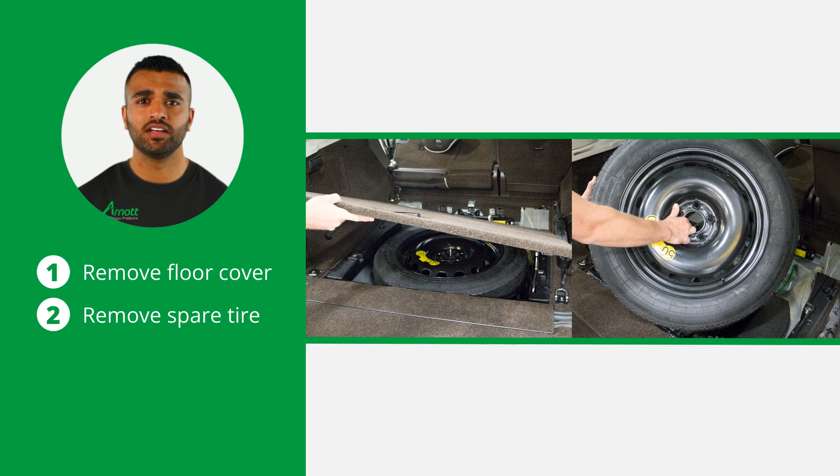Start by removing the floor cover and spare tire in the rear cargo area to expose the vehicle's air suspension compressor housing. Now remove the 4 bolts holding the compressor cover to the vehicle. Then remove the 2 foam pads and the compressor from the vehicle.

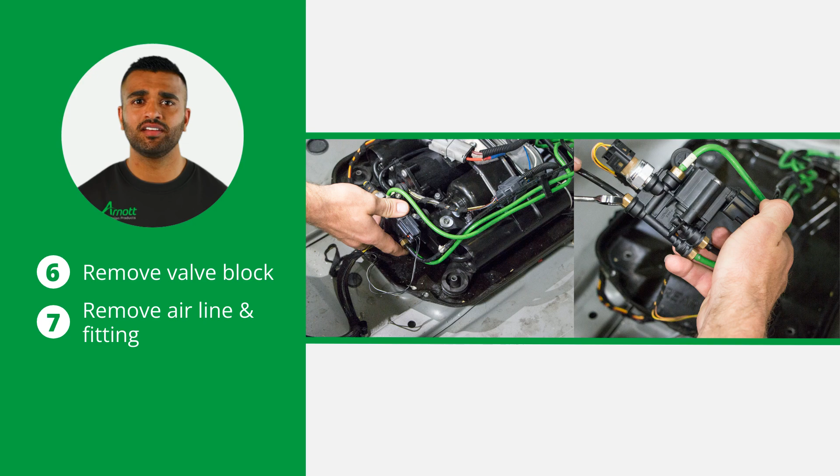Next, remove the valve block from the compressor bracket. Then remove the airline and airline fitting from the valve block. These are located next to the pressure sensor. Now remove the lower airline from the compressor. Press and hold the quick connect fitting while pulling out on the airline.

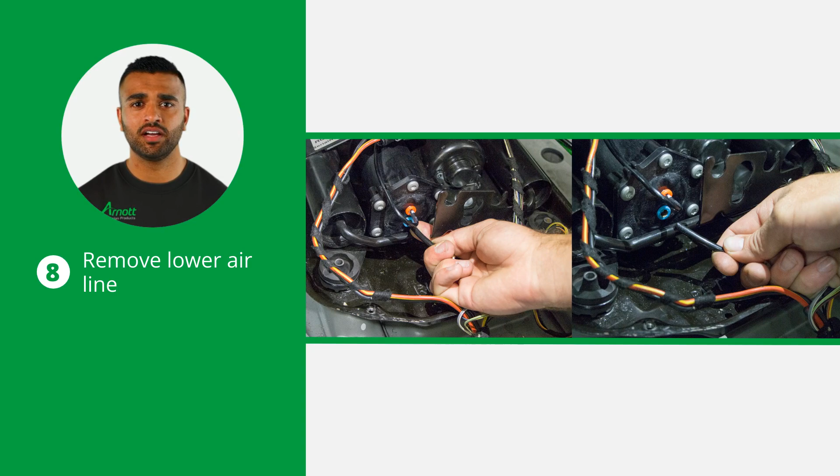Next, disconnect the 2 electrical connectors from the compressor assembly to the vehicle. Remove the 4 mounting bolts holding the compressor assembly to the vehicle. Now carefully remove the compressor assembly.

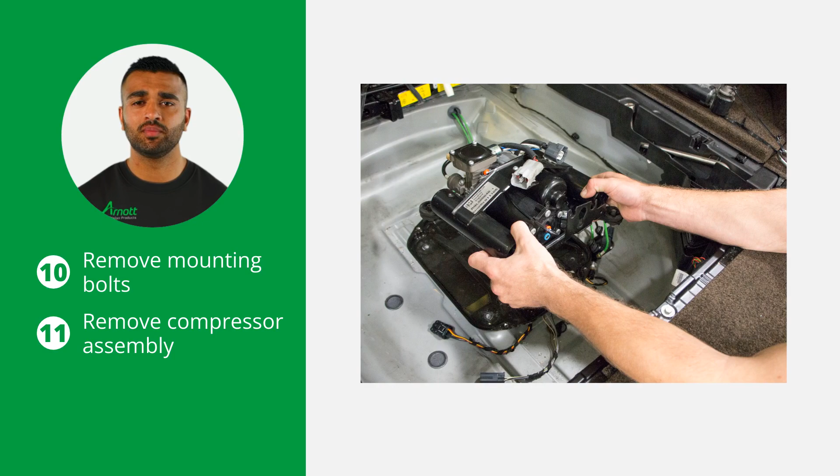For the air suspension compressor assembly installation, make sure to tighten all nuts and bolts to manufacturer's specifications during the installation process. Start by installing the compressor assembly into the vehicle using the pre-installed mounting hardware. Now connect the pre-installed air fitting to the valve block. Make sure to not over-tighten the airline fitting.

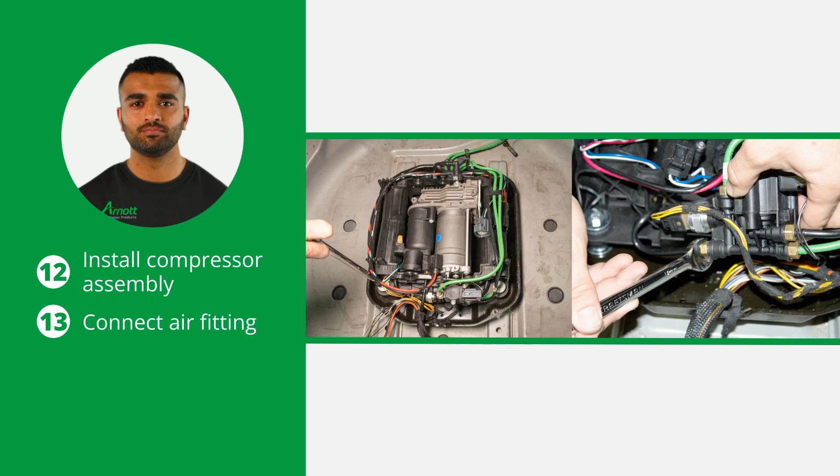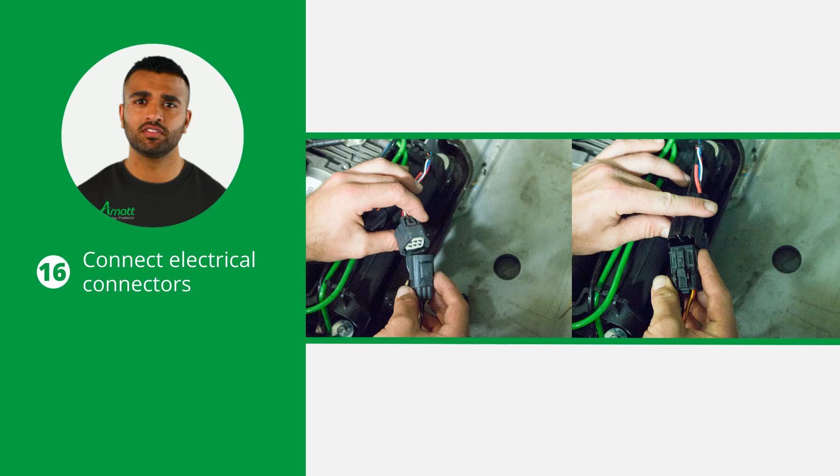Now install the valve block onto the mounting bracket. Then insert the airline from the valve block into the air fitting, making sure it is properly seated. Next, connect the 2 electrical connectors from the compressor to the vehicle's wiring harness. Secure the air hoses and wiring harness to the mounting bracket.

Now finish the installation by reinstalling the air compressor cover, foam pads, spare tire, and cargo area floor in the reverse order of removal using the factory mounting hardware.

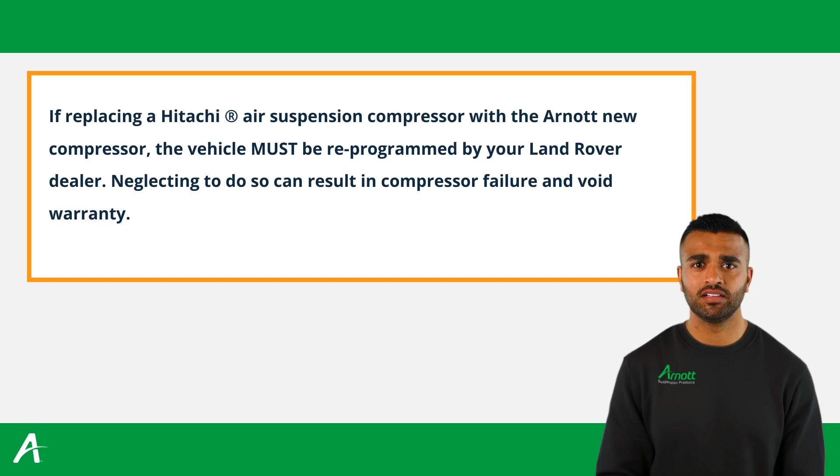If replacing a Hitachi air suspension compressor with the Arnott new compressor, the vehicle must be reprogrammed by your Land Rover dealer. Neglecting to do so can result in compressor failure and void warranty.

Lastly, it is very important to replace the air suspension compressor relay, which is located on the right side of the rear cargo area. Remove the compressor relay and replace it with the unit provided in this kit. Failure to replace this relay can cause compressor damage or void warranty.

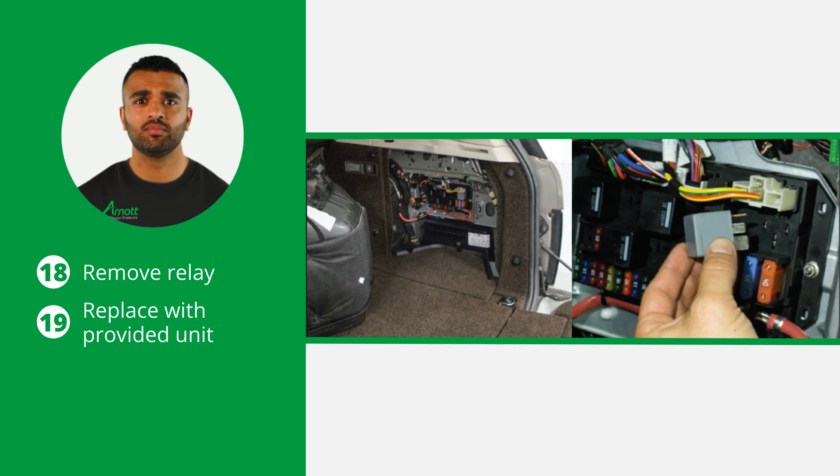Inspect the air springs for any type of cracks or excessive wear. Leaking air springs will cause the compressor to overheat from continuous operation.